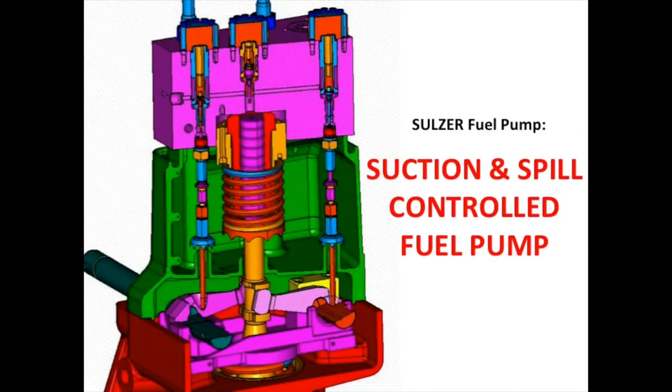This technical video explains the general construction and working of a suction and spill control fuel pump, most commonly used in Sulzer and Wärtsilä two-stroke engines. Let's take a front cross-sectional view of the pump for simple understanding.

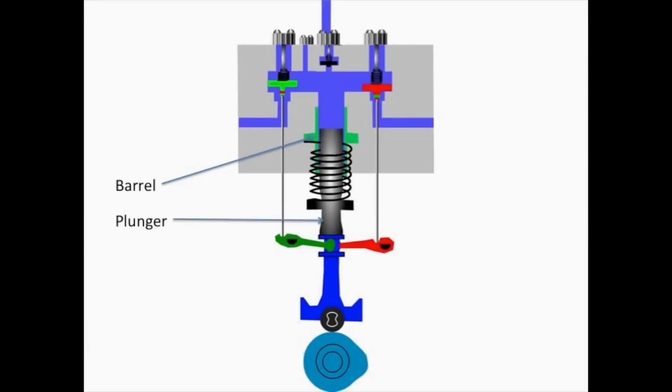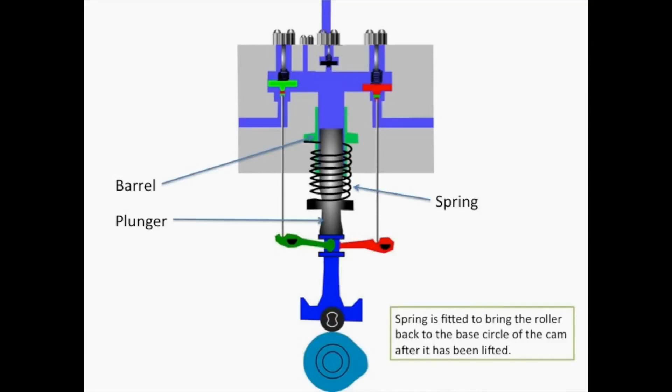The pump comprises a barrel, which is a cylinder fixed in the pump body, which also accommodates the plunger, and it has a very high surface finishing. A plunger which reciprocates inside the barrel with minute clearance to push the fuel out of the pump. A spring in the plunger follower assembly to bring back the roller into the base circle of the cam once the lift is over. A suction valve which controls the flow of fuel into the pump, and it is also responsible for the beginning of the fuel delivery.

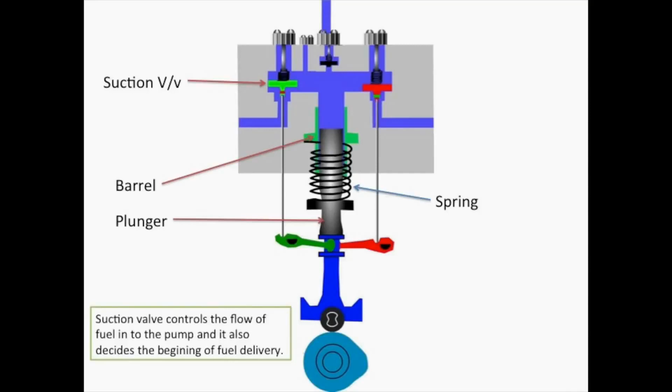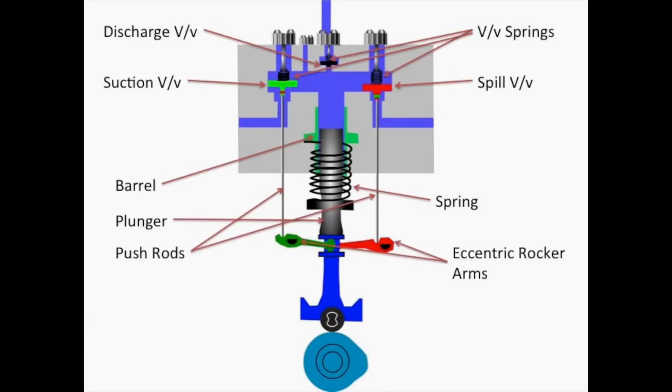A spill valve which controls the end of the fuel injection. A discharge valve from which the fuel is delivered to the fuel injector at high pressure. Valve springs in all the three valves for positive closing. Two push rods are installed in suction and spill valve for opening these valves. Two eccentric rocker arms which operate the push rod. The eccentric position can be changed to vary fuel delivery or end of the injection timing.

A cam in the fuel pump camshaft which operates the reciprocating movement of the plunger through the cam follower. Roller or cam follower which transmits the movement of the cam to the plunger. These are the different parts involved in the construction and operation of the fuel pump.

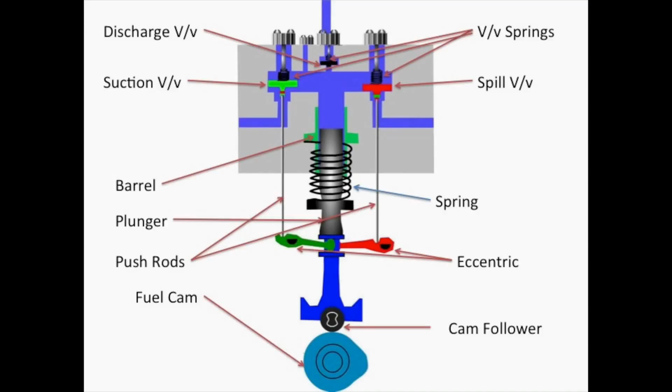During normal working condition, the fuel is delivered into the cylinder via the discharge valve in a fraction of a second. To understand this process, let's take a look at this system in slow and step-by-step motion. When the follower rolls on the base circle, the suction push rod lifts the suction valve and fuel goes inside the pump.

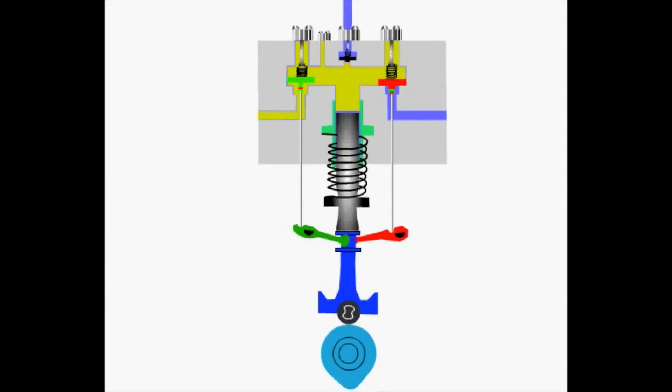With the follower assembly moving up the cam profile, the suction push rod moves down due to the position of the eccentric, which is between the push rod and the plunger, leading to closing of the suction valve. As the spill valve is already closed, the upward movement of the plunger results in delivery of fuel at high pressure into the engine cylinder just before the top dead center.

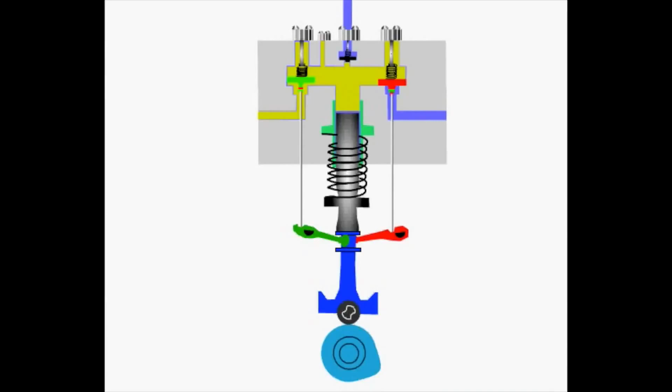The position of the spill eccentric is outside the push rod. Hence, during further movement of the cam, the spill push rod lifts and opens the spill valve, draining the fuel out of the pump, which also cuts the fuel delivery. This is the general operation of the fuel pump, and the complete process is repeated every cam cycle.